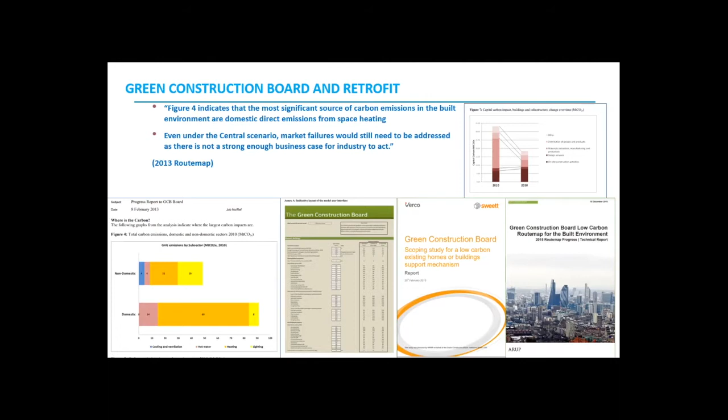So basically we got down to quite a lot of detail on what the expectations were, but we were talking carbon rather than energy at that time. And simultaneously, we commissioned a report from Verco on setting up a retrofit hub or building support mechanism. And then we had an update of the route map, but that, I think, fell on deaf ears, because what happened shortly after that was the launch of the Green Deal, which I'll come back to.

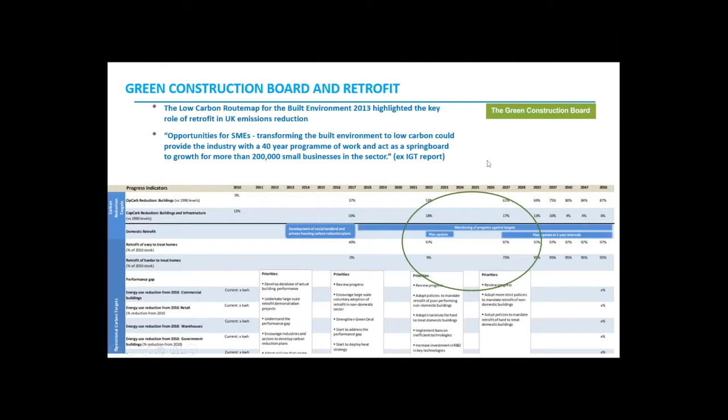But yes, we basically highlighted the fact that in order to meet the then 80% reduction, halving or up to 2/3 of carbon reduction was required in our existing buildings, and that assumed in the 2020s, where we are now, that 75% of hard to treat properties needed energy efficient retrofit. And further to that, after the Green Deal, a few disasters.

Rob Lamb and I, as part of the Green Construction Board, supported Peter Hansford, Paul Morrell's successor, in his report on solid wall insulation, which was addressing the pitfalls and the unintended consequences of Green Deal. As distinct from a measures-based approach, he came out firmly in favor of the whole building approach, and the need for clear standards and compliance mechanisms, and better skills and accreditations, and the creation of a retrofit hub, and the role of leadership, and these recommendations will echo with some of the detail that I'm sure Russell will talk about in relation to our current proposals.

And following on this, government set up Each Home Counts, the Bonfield Review, and subsequent to that, of course, the PASs related to ECO, PAS 2030 and PAS 2035, and the rest is current history, really. And following on that, in 2019, I, on behalf of the Green Construction Board, set up the Building Mission Task Group, because we leapt at the chance to respond to a policy announcement to halve all building energy use by 2030. Well, that was actually for new build, but just for retrofit, halve all building energy use.

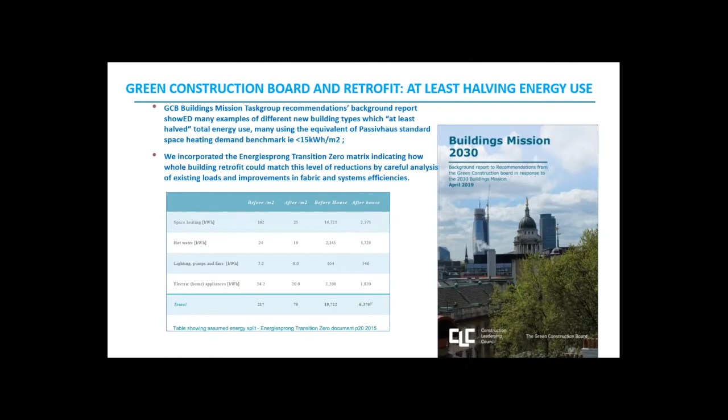Without going into any great detail, our key recommendations in the background report were, you know, analyze total energy, where we're at now, look at where you can tackle the energy efficiency role in emissions reduction. In this case, I included this illustration from the Energiesprong report, Transition Zero. Oops, wrong way.

And then following on that, we made some recommendations in relation to retrofit, which are kind of set out here, calling for a national retrofit plan, calling for the deployment of digital building passports, a need for a leadership and national program and communications, particularly advice, the need for minimum performance thresholds and verifications on completion. So we didn't get a massive performance gap in retrofit as well.

So that was when I came upon Russell and his work for NEF, and at the CLC's RMI, Repair Maintenance Improvement Group, we kind of coalesced because there was a great deal of synergy between our journeys, if you like. And Russell will talk more about the interlock of standards and basically the national retrofit strategy, which is now endorsed by CLC, which estimates that 97% of the stock needs energy efficiency retrofit by 2040.

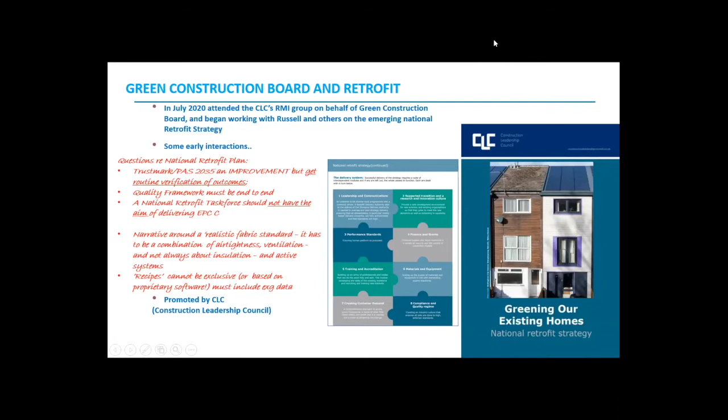So, Andrew, I'm trying to rattle through. I hope I'm going quick enough.

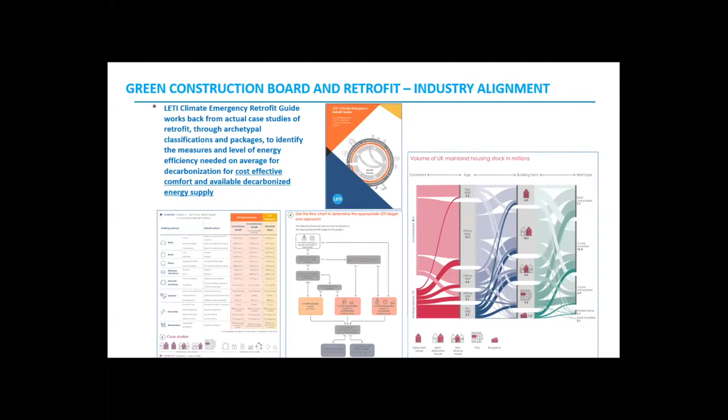A couple more slides. At the same time as promoting and refining the national retrofit strategy, I was also working with LETI on their climate emergency retrofit guide, which analyzes the UK stock and works back from actual studies of energy efficient retrofit and decarbonisation, using heat pumps, with archetypal classifications, typical packages, and comes out with a kind of median energy demand that we should be aiming at.

And at the same time, I was also working with UK Green Building Council on the steering group of the whole life carbon route map. And no surprise, I also inputted with others on the retrofit guidance. Well, not guidance anymore. It's a much more specific level of energy and carbon impacts of our existing buildings and where we need to get to meet the Paris targets.

So actually this was the thing that was launched at COP, Andrew, the only thing that was in the blue zone, I think, of consequence for our industry, other than pioneering leadership from the private sector. But it remains to be seen how the advice to policymakers from UK Green Building Council and indeed our national retrofit strategy, where it's going to land, if at all.

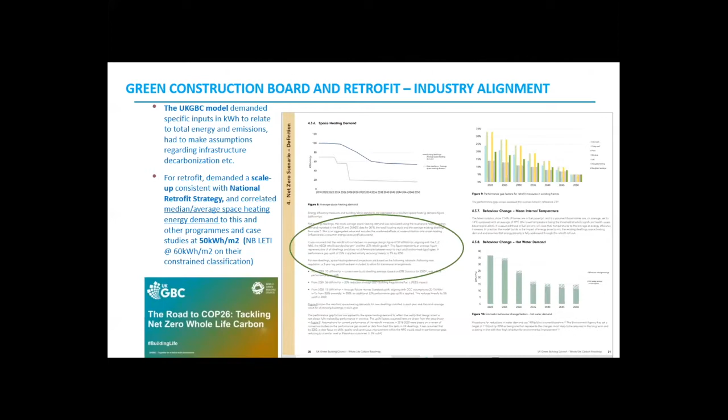But yes, if you delve deeply into the roadmap, the UK GBC model, they have to put actual numbers into a model. It's no good putting EPC C in. It had to get real, and the median energy demand of retrofitted properties aligned with the national retrofit strategy and the LETI work. So that's pretty key, and they actually specifically reference the national retrofit strategy as a key strategy on the road to whole life net zero.

So yeah, there's the distribution network operator issue, which they're saying could really cost householders to upgrade the capacity of their system. And at the same time, the Heating and Hot Water Industry Council, representing all those installers, realise the spotlight's on them, because Boris is only talking about heat pump installations at the moment, not energy efficiency.

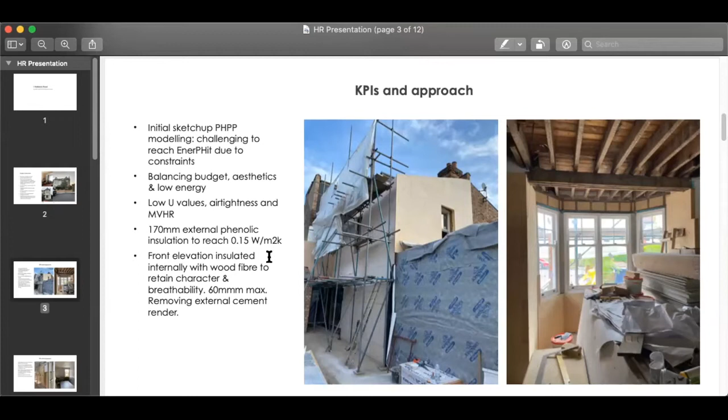And then triple glazing to all new windows except the front elevation. So the strategy at the front was to have new double glazed sashes with secondary glazing inside of that, which was something we tested. All of the new windows at the back are triple glazed Velfac or oak framed bespoke units.

Continuous air tightness layer. So that's either an Intello Plus membrane to any timber construction, so the loft conversion or the rear extension or the floor of the house. Or for existing masonry walls, just a simple 12 mil lime plaster finish, which apparently is airtight if you use a thick enough layer like that. And that gave us our aesthetic finish because you don't need to paint lime plaster. You get a nice quality and a natural variation of the lime.

And then we looked at embodied energy, so things like carrying on the suspended timber floor in the rear extension, so we don't have to have a big concrete slab, avoiding concrete, so a stone floor instead of polished concrete floors. And we didn't have any steels at all in the loft conversion, which is actually really straightforward to do on a typical Victorian house.

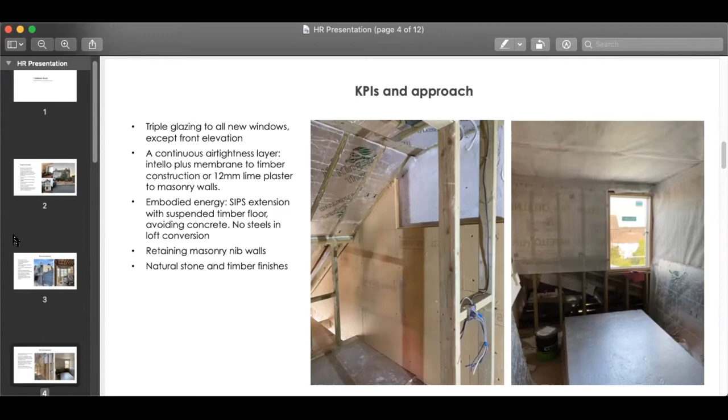Also things like retaining masonry nib walls downstairs to give you the lateral stability rather than putting in big steel box frames. You can just have a single steel above. And then

So some details on the wall build-up. So yeah, you just have to go into slightly more depth than usual and think about the build-up at each part of the building. We did consider using aerogel for some of the tighter elements, but it got value engineered out in the end and we went for wood fiber. And from that, the details showing the ground floor plan with the rear extension here, new triple glazed windows going in at the side.

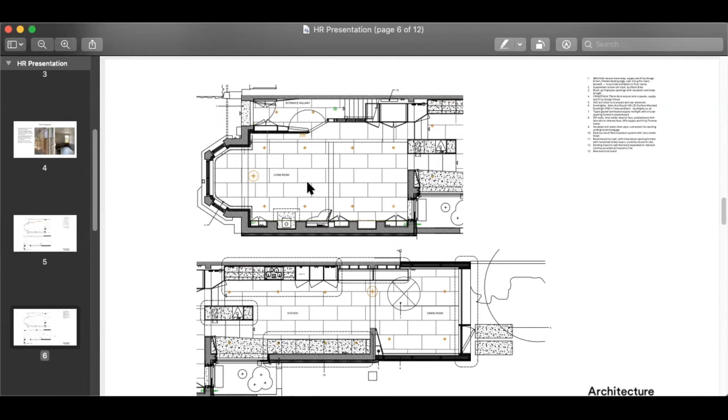And then some of the key challenges: working with a small contractor that hadn't done much low energy retrofit before, balancing the extra architectural time without loss of design quality, thinking about MVHR runs and designing those in earlier. And we had some problems with the MVHR cupboard dimensions on site, which steadily grew much larger than it was supposed to be.

Budget issues meant we didn't have renewables, so we still have a gas combi boiler, but the strategy was really just to bring the heat demand down as much as possible, and then in future perhaps we can look at air source heat pumps.

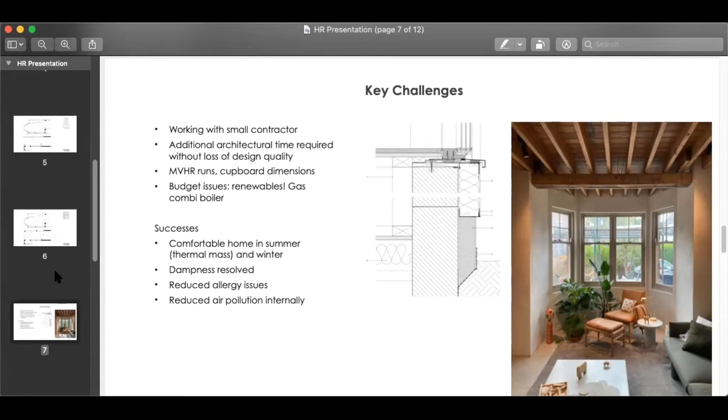And so successes. So it's a really comfortable home, both in summer with the exposed thermal mass and in winter, obviously being much warmer. Dampness has been resolved, and I suffer from hay fever, but last year was the first year I didn't have any real problem with it. So so far that seems to suggest some reduction in allergy issues. That's because the MVHR filters the incoming air, and the same thing there, it deals with the air pollution. We live next to a busy road, so it's quite reassuring to know that the air quality internally should be a bit better because of the MVHR filter.

And just some photos of the result. That's the new jungle garden. Some of the stone and timber finishes in the bathroom. That's Astrid the cat. You can see her enjoying the new underfloor heating and warm interior.

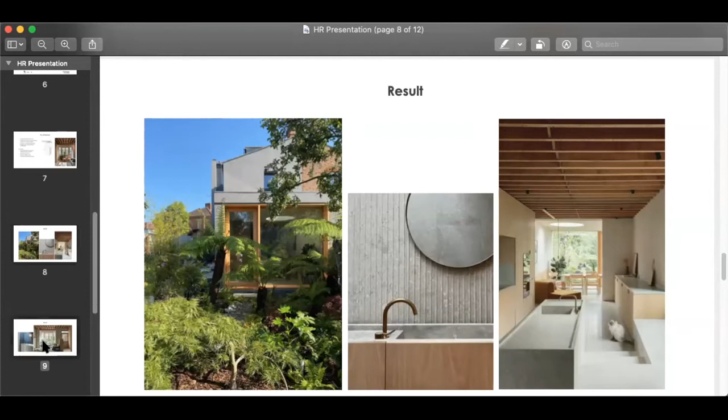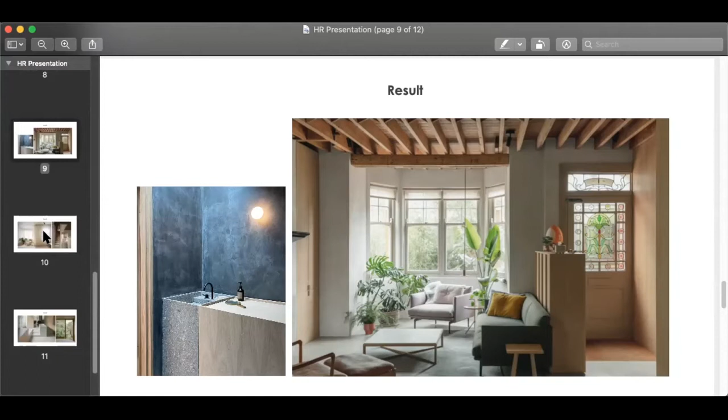Some photos. So that's the more traditional part of the house at the front with the bay and the stained glass. So the stained glass is the only single glazed element left, but we dealt with that with a secondary glazed layer inside of that. So it's definitely not passive house detailing, but again, sort of balance of aesthetics there. That's the living room at the front. So all solid timber Douglas fir there, so fairly low embodied energy, and ground floor timber and stone finishes.

And then at the rear, that's a big triple glazed unit and triple glazed door opening out onto the garden, and it's a SIPs rear extension. So that's a 172mm insulated SIP construction. So it's super insulated and relatively airtight, prefabricated. So hopefully it closes the performance gap a bit, being installed by the experts. And then the front elevation. Thanks.

Thank you, Ben. There's been a few eyebrows raised in the chat about whether £250,000 is a tight budget, but I do know that you were very careful about costing the benefit of things, because almost my first question was are you going to put in a heat pump? And you told me that would be too expensive. So do you want to respond to that, or wait until we get to talking about the cost of things and how you value those? Because I thought it was very interesting in your position statement. You said you've got to think about the amount of time before that house will have any opportunity to do the sort of retrofit that you did.